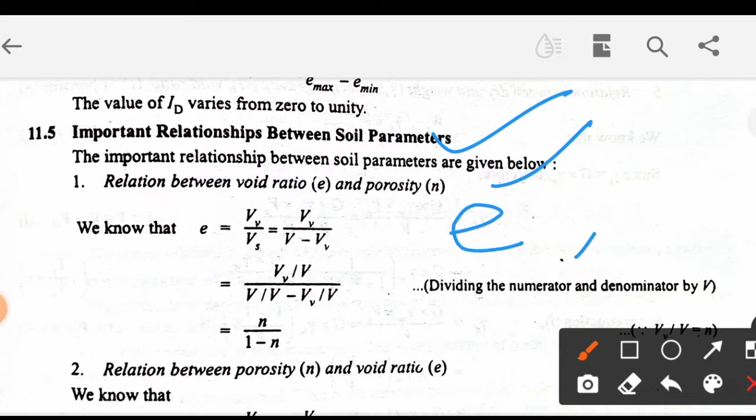Important relationships between soil parameters are given below. Relation between void ratio and porosity: void ratio E and porosity N. Void ratio E equal to N upon 1 minus n. This is a very important numerical, very helpful in mathematics.

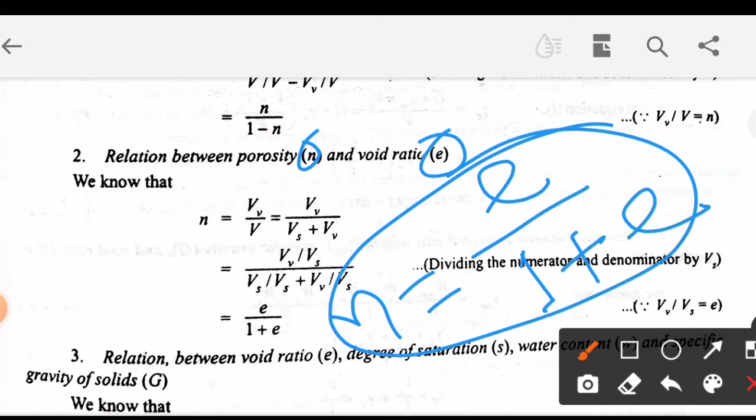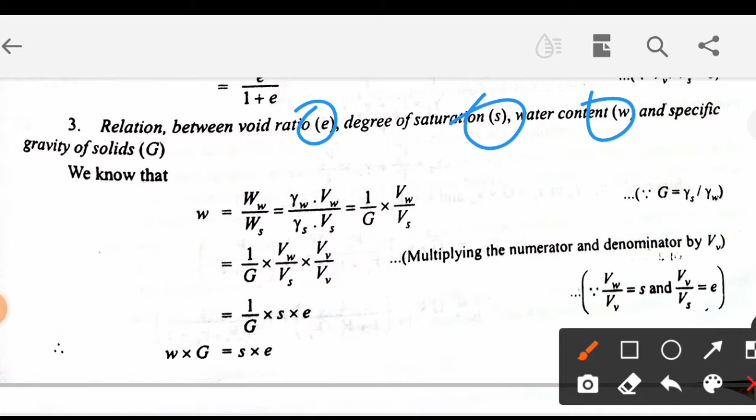Number 3, relation between void ratio, degree of saturation S, water content W, and specific gravity of solids G. Here, very important: W into G equal to S into E, i.e. WG equal to SE. Here W is water content, G is specific gravity, S is degree of saturation, E means void ratio.

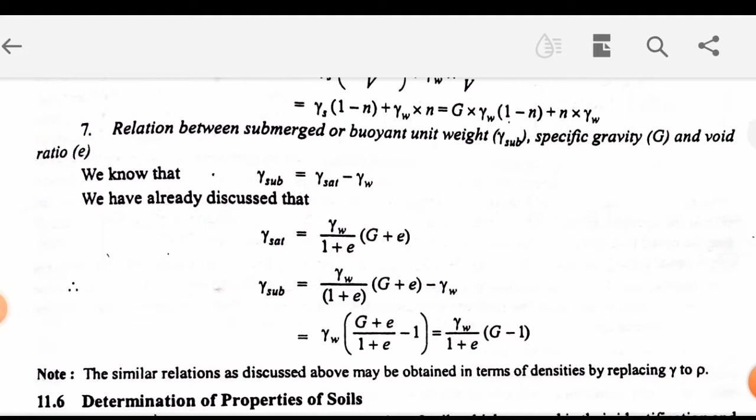Determination of properties of soils. The method of determining those properties of soils which are used in their identification and classification are as follows: determination of water content. The water content of a soil sample may be determined by the following methods.

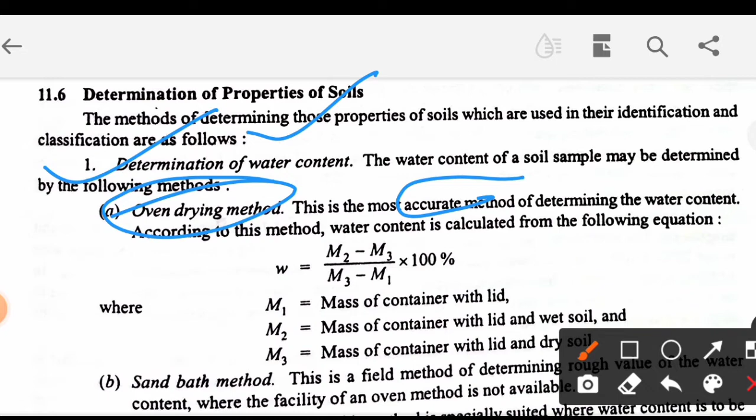Determination of water content. Method number 1, oven drying method - very important. This is the most accurate method of determining the water content. According to this method, water content is calculated from the following equation: W equal to M2 minus M3 upon M3 minus M1 into 100%.

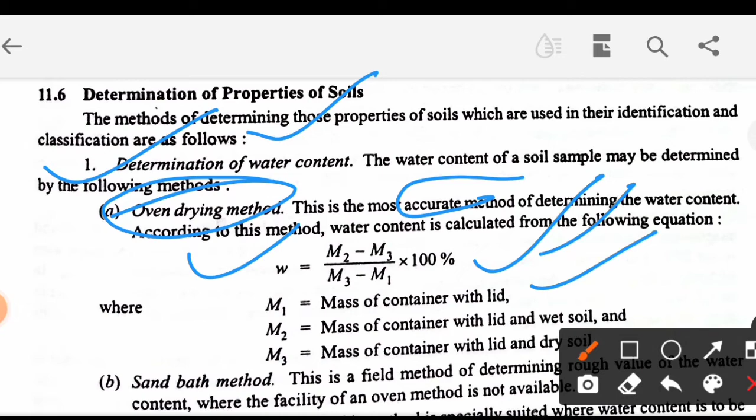Here M1 is mass of container with lid, M2 is mass of container with lid and wet soil, M3 is mass of container with lid and dry soil.

Sand bath method, number B. This method is a field method of determining rough value of the water content, where the facility of an oven method is not available. This is actually done at the field where construction work is going on - calcium carbide method.

Number C, calcium carbide method. This method is especially suited where water content is to be quickly determined for the purpose of proper field control, such as in compaction of embankment. Very important.

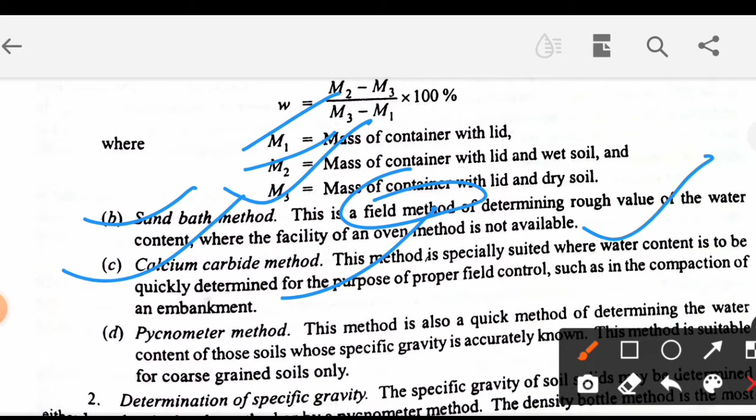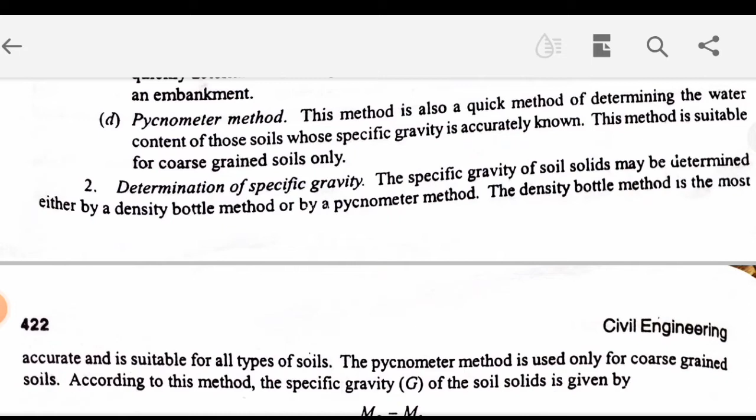Pycnometer method. This method is also a quick method of determining the water content of those soils whose specific gravity is accurately known. This method is suitable for coarse-grained soils only. Very important.

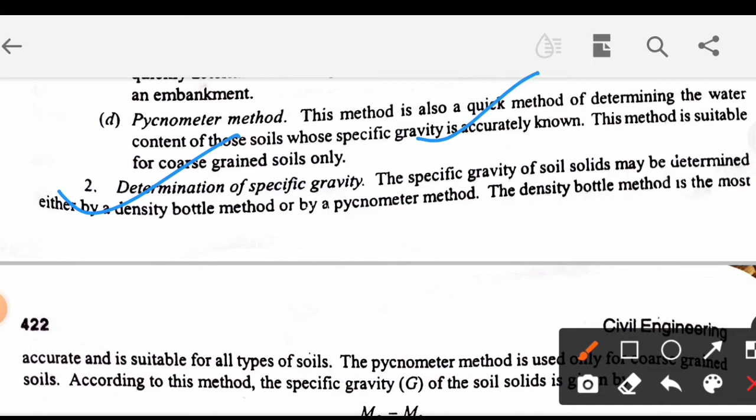Determination of specific gravity. The specific gravity of soil solids may be determined either by a density bottle method or by a pycnometer method. The density bottle method is the most accurate and suitable for all types of soils. The pycnometer method is used only for coarse-grained soils.

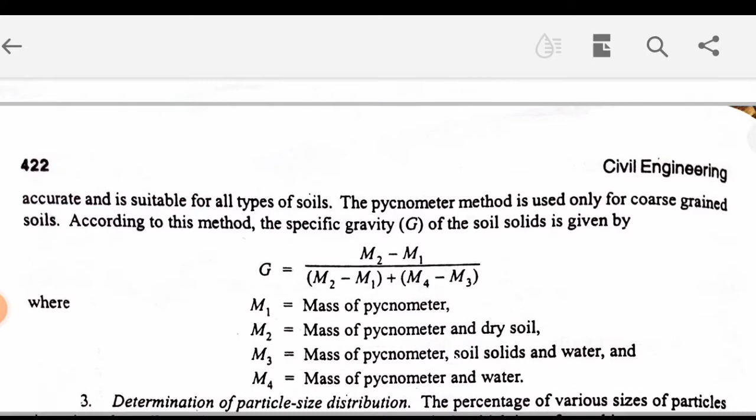According to this method, the specific gravity of the soil solids is given by G equal to M2 minus M1 upon M2 minus M1 plus M4 minus M3. M1 is mass of pycnometer, M2 is mass of pycnometer and dry soil, M3 is mass of pycnometer, soil solids and water, and M4 is mass of pycnometer and water.

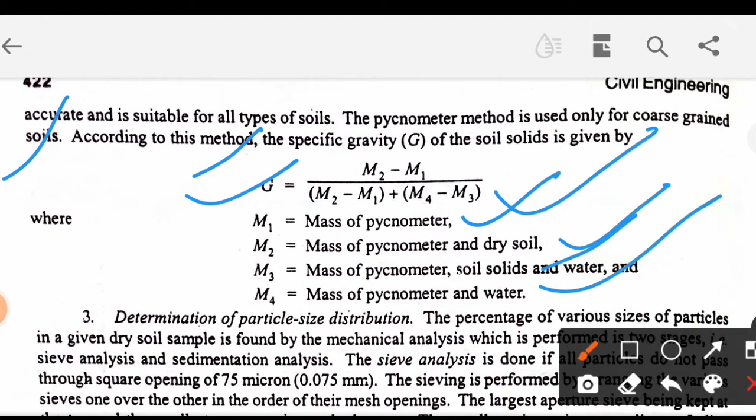Determination of particle size distribution. The percentage of various sizes of particles in a given dry soil sample is found by the mechanical analysis which is performed in 2 stages: sieve analysis and sedimentation analysis.

Sieve analysis is done if all particles do not pass through a square opening of 75 micron, i.e. 0.075 mm. This sieving is performed by arranging the various sieves one over the other in the order of their mesh openings, with the largest aperture sieve at the top and the smallest at the bottom. The smallest sieve size according to Indian standard is 45 micron, i.e. 0.045 mm.

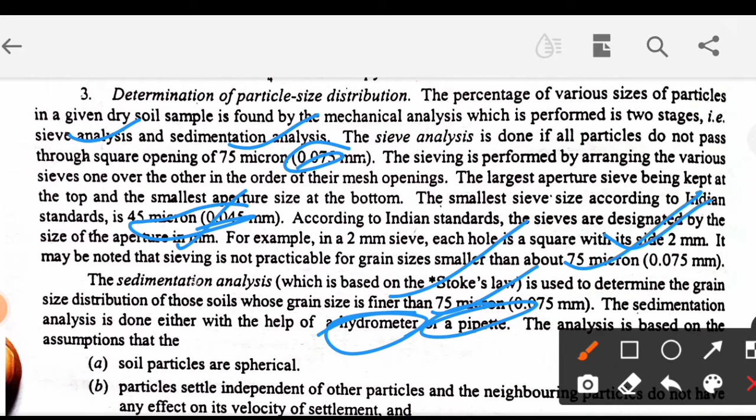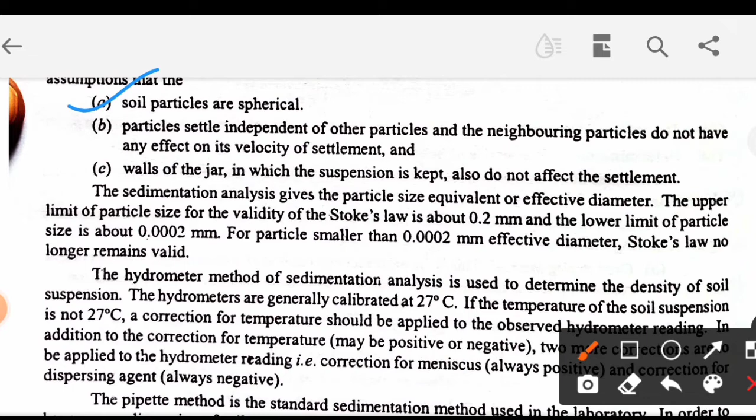The analysis is based on the assumptions that the soil particles are spherical, particles settle independent of other particles and neighboring particles do not affect its velocity of settlement, and walls of the jar in which the suspension is kept also do not affect the settlement. This sedimentation analysis gives the particle size equivalent or effective diameter.

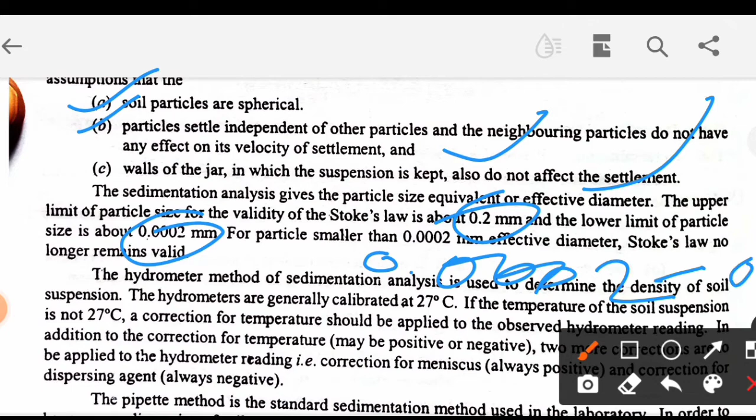The upper limit of particle size for the validity of Stokes law is about 0.2 mm and the lower limit is about 0.0002 mm, meaning its range is 0.0002 to 0.2 mm effective diameter; beyond that Stokes law no longer remains valid.

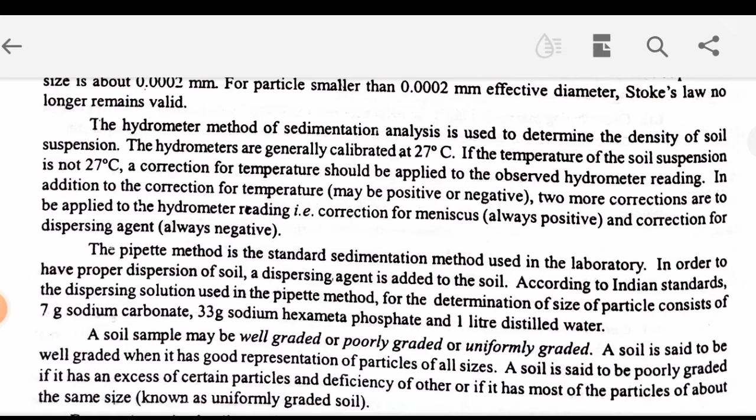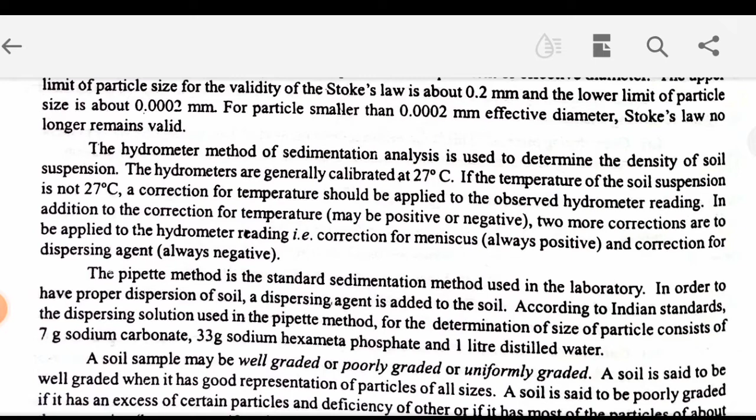The hydrometer method of sedimentation analysis is used to determine the density of soil suspension. The hydrometers are generally calibrated at 27 degrees Celsius. If the temperature of the soil suspension is not 27 degrees Celsius, a correction for temperature should be applied to the observed hydrometer reading. In addition, two more corrections are to be applied to the hydrometer reading.

Correction for meniscus, always positive, and correction for dispersing agent, always negative. The pipette method is the standard sedimentation method used in the laboratory. In order to have proper dispersion of soil, a dispersing agent is added to the soil.

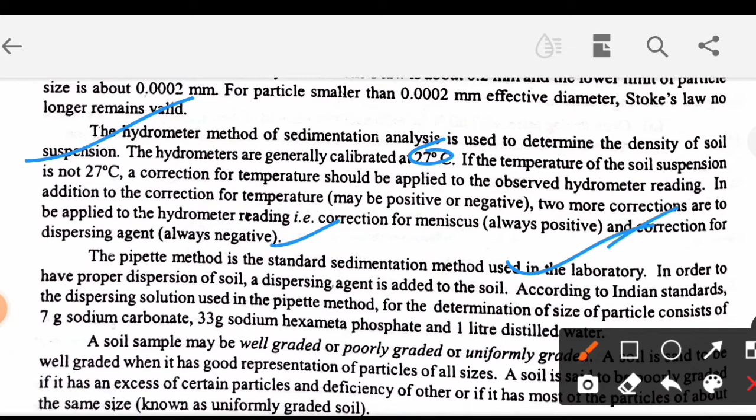According to Indian standard, the dispersing solution used in the pipette method for determination of size of particle consists of 7 grams sodium carbonate, 33 grams sodium hexametaphosphate, and 1 liter distilled water.

A soil sample may be well graded, poorly graded, or uniformly graded. A soil is said to be well graded when it has good representation of particles of all sizes. A soil is said to be poorly graded if it has an excess of certain particles and deficiency of others, or if it has most of the particles of about the same size, called uniformly graded soil.